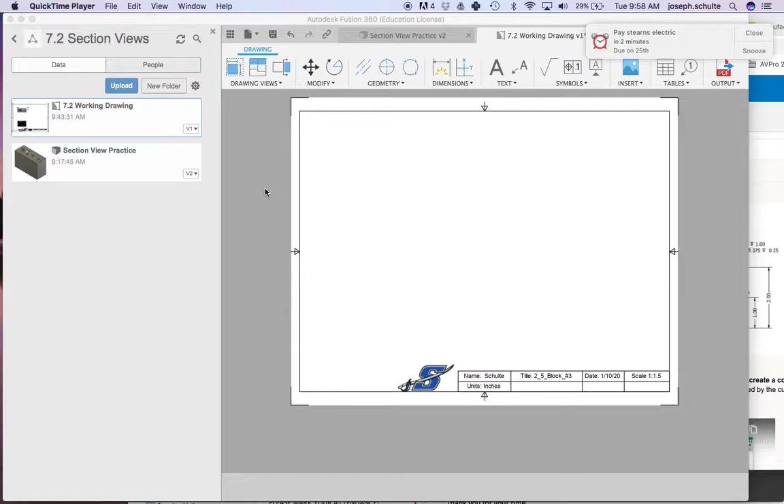Show Techno 7.2 section view coming at you with the details on the working drawing. This has been a struggle for me, man. And actually, the original videos I had posted really showed you what the finished product should look like, but not how to get there. So my apologies.

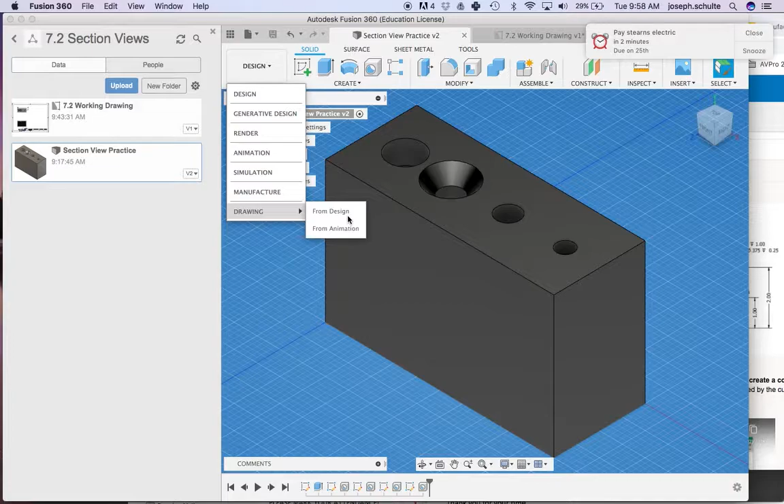I created a block with holes, countersunk, counterbored. They are placed correctly. I moved that block from design into a drawing, and from a template from a Sabre A-size sheet, that's the template that I'm using, I moved it over here to a working drawing. It took a while for this to open up. Again, it's a struggle for Fusion to get these working drawings open.

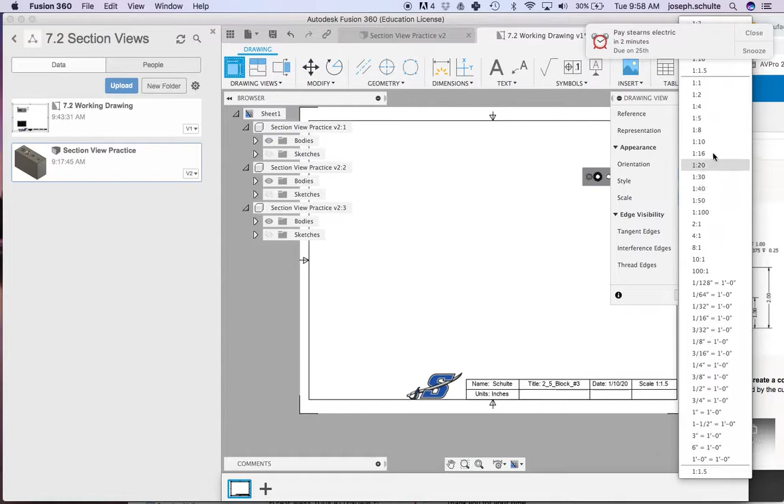I'm going to place a base view. I have to start by placing a base view of my block. I know from experience that my front view is not the orientation I want. I want to look at the top and treat that as my front view. And I'm going to put it up top here, and I'm also going to make it a 1:2 scale. That hasn't been so much a problem. Something like that, because I got to leave room for my descriptions of my hole notes. I will click OK. It's going to be wireframe.

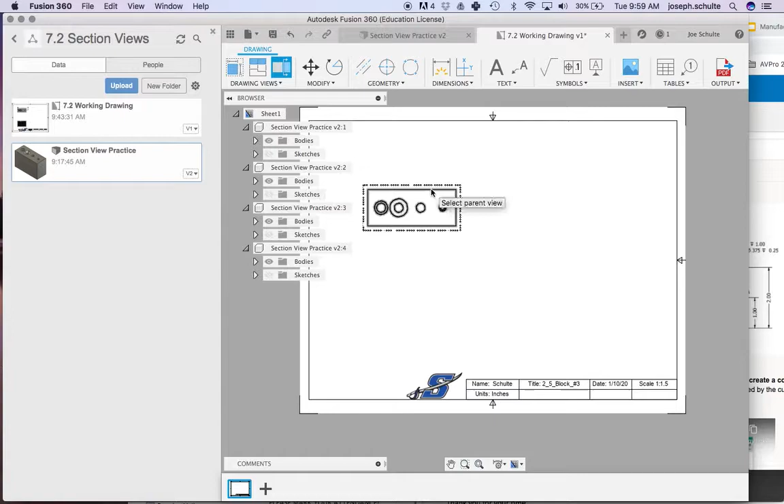Now I want to place a section view. It's asking me, what do I want to section? I want to section this. I'm going to choose the midpoint here and the midpoint here, and I've got my arrows pointing down. I'm going to hit return on the keyboard. I'm just hovering over that. I'm going to hit return. I might have to click one more time. Okay, now maybe I got to get these arrows facing the same direction. There, enter on the keyboard. Enter again.

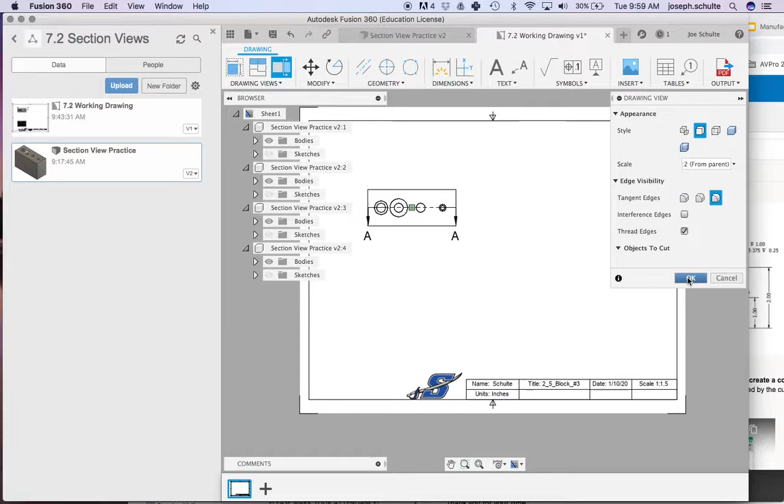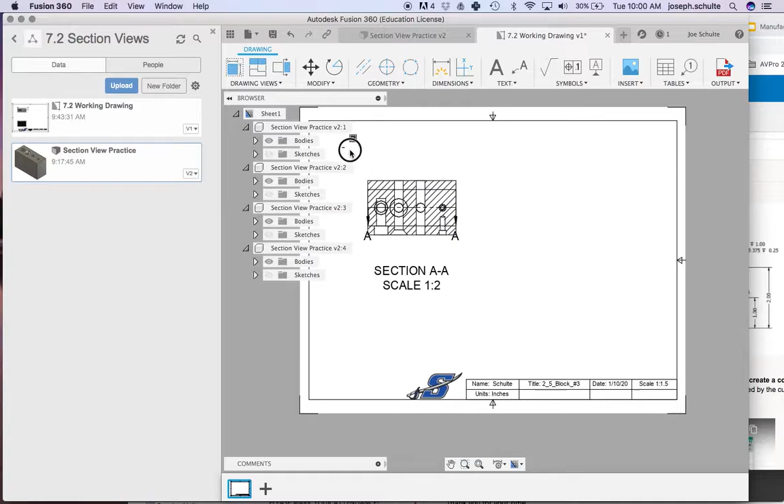And it's working on it? I don't know. I'll click OK. That's going to be wireframe. That's good. Yeah. And now this is laying right over the top and is a huge mess. Okay.

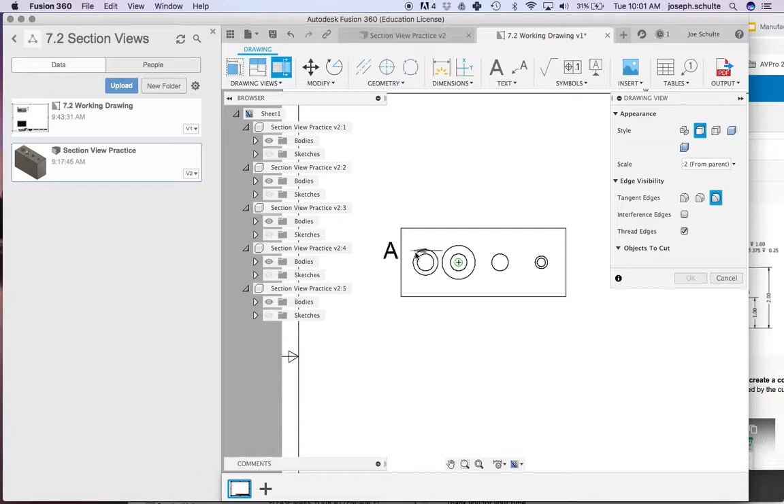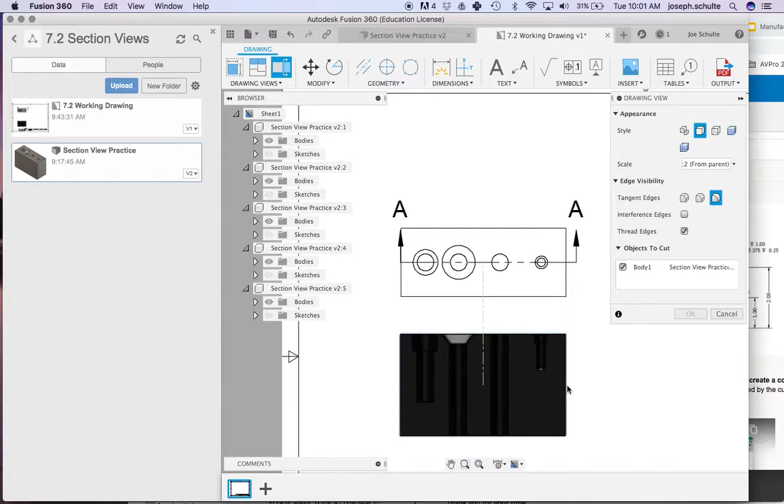Oh, that worked. That was difficult. I don't know what to say there. It's been a struggle. Place a base view. We chose a projected or a section view, and now we actually have the orientation we want. What we don't have yet is, well, we'll see. We're going to drop it lower here. I'm going to zoom out so I get my placement correct, something like that, and click OK.

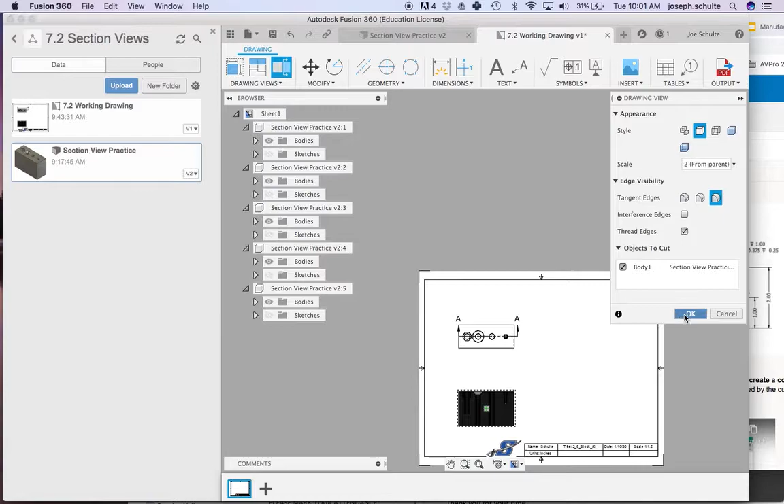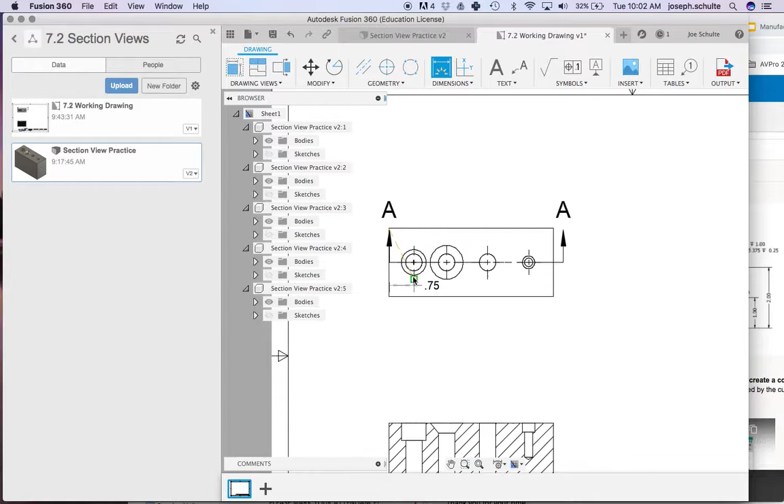Huh. Okay, so a section view, a proper section view shows this cross-hatching, which is material, but the actual lines that define the holes are solid because we're cutting this in half. From here, what else do I need to define? Well, I need to locate all of these holes, so I need to put center marks in for all these holes because I'm going to have to datum dimension these. Datum dimensioning meaning I'm going to reference edge dimension all of these holes. I will stagger with the smallest dimensions closest to the block. Create some nice spacing here. Very nice. The last one should be 4.25.

I need an overall block width. I need an overall block height. I need a distance to center line to show that this is in fact centered. Why is that 0.5 though? Dimension. There we go.

And now I need to put these hole notes in. And these hole notes, we could try and dimension those. If I hit the D key, it's going to tell me 0.75. But I don't think it's going to let me change the text the way that I would want it to. So if I try that, double click on that text, I'm going to hit escape, double click. Yeah, it doesn't give me, well, I could do it here. So I know that that hole note needs to look like this. The first hole is a diameter of 0.5, depth of 2, counterbore diameter of 0.75, depth of 0.5. So I would do, see, I can't delete that original number because I clicked on it, so I'd have to work that in.

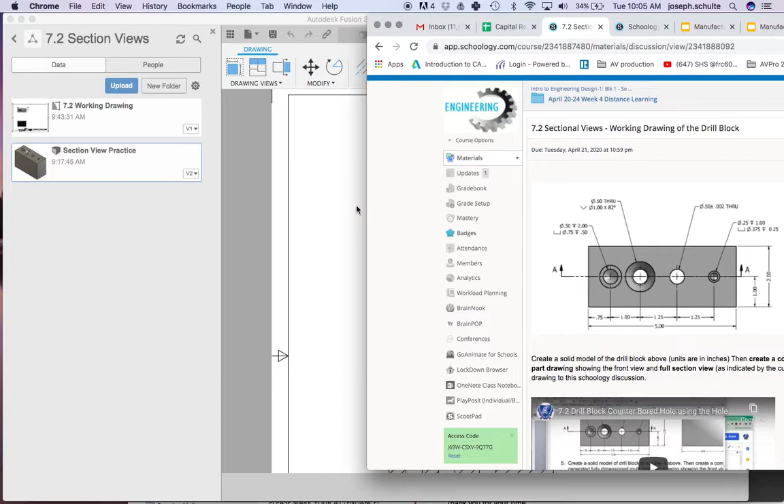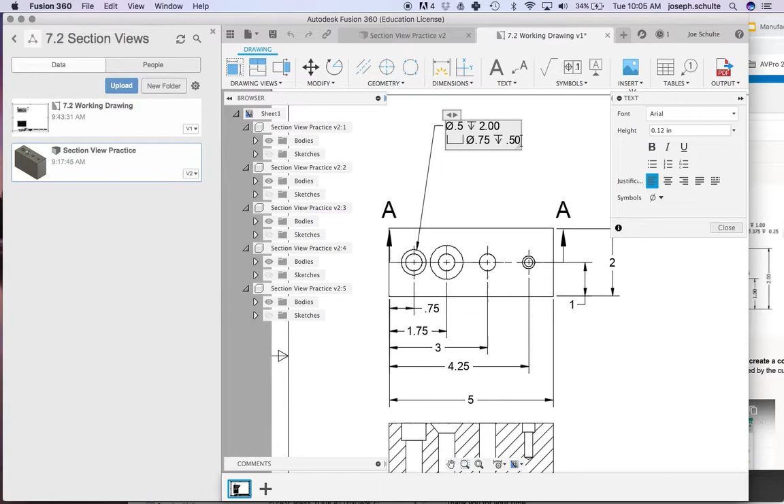Man, struggles. Double click, get back into here. Counterbore diameter of 0.75, so I need another symbol. 0.75. Wow. I don't understand why it's so glitchy. I got to double click back in. As soon as I put a symbol in, it doesn't let me type. 0.75 with a depth of 0.50. So I'm going to try and put another symbol in. Depth. Yep, I can't enter any more text. I don't know why. I'll click away, double click back in. That's not right. It's 0.50. That's correct. Okay, so my first one is done and correct, and that is using leader text.

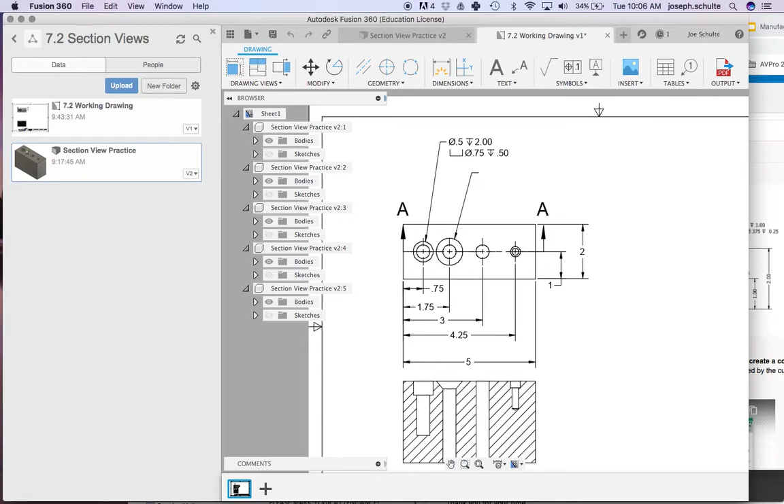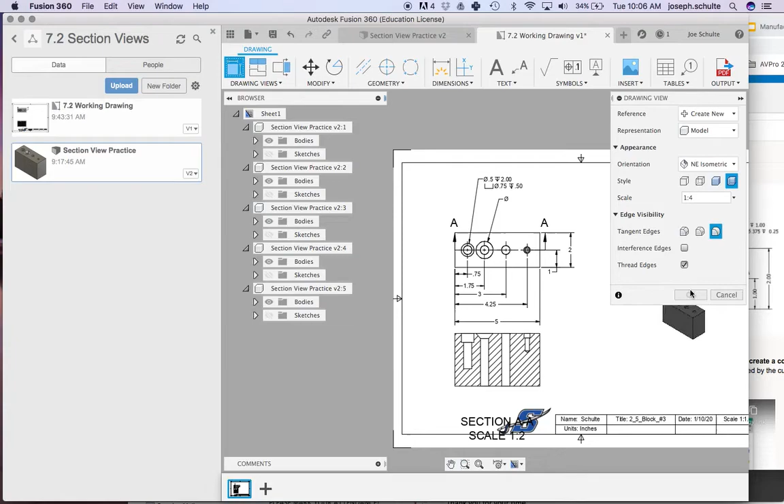So then I would leader text the rest of these, space them out as best I can, put my nomenclature in here, symbols and diameters and such. Okay, those are the basics. How to do a section view properly. I can place another base view, and in this case it would be an isometric. So northeast isometric wireframe. Well, let's make it a solid. And we'll place it out here. Click OK. Just so we can get it on the screen. Try and move it here. It's going to let us move it, and we'll make it 1:2 scale as well.

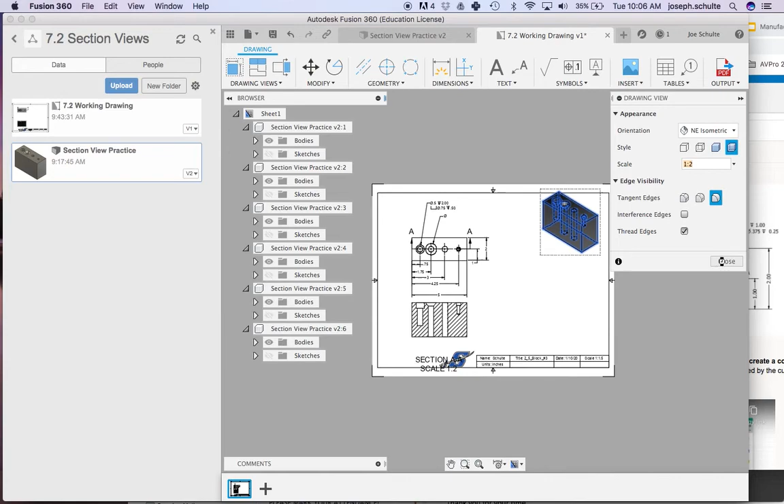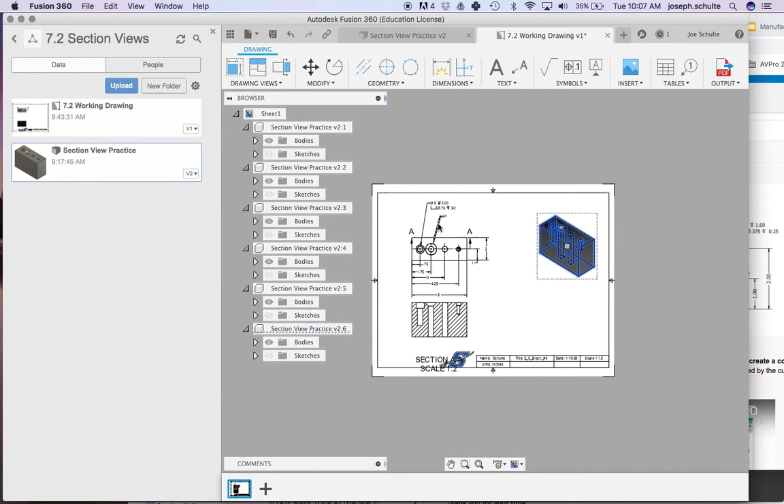Got to go back in. There we go. Close. Oh, Fusion, come on, you can do it. Place that appropriately. Now we're getting closer to what this should look like. I got my critical overall dimensions, location of holes, datum dimensioned off this reference edge. I can see the profiles of all of these. They line up. I just need to finish out these and I will have it. Scene.